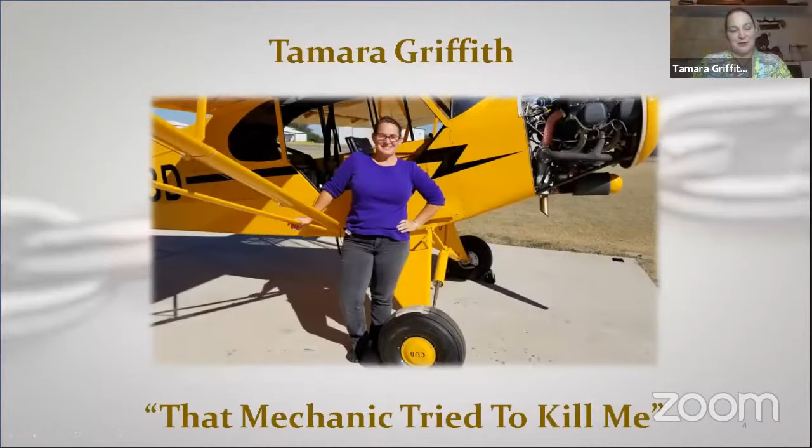Tamara, you have the flight controls. Well, that's a scary thought. I have the... just kidding, we got to have some fun, right? We should all be very afraid when I take the flight controls.

Great introduction there, Jeremy and Paul. Great to see you too. Look forward to seeing that 182 when you're all finished with it.

And welcome to That Mechanic Tried to Kill Me. This originally started with my mom back in the day, she started this program, and I've added to her original talk on That Mechanic Tried to Kill Me. So some of these are her stories, and then there's my stories and other stories that I've learned over the years. So without further ado, I have a PowerPoint, and I will share my screen so you can see all of what I'm going to show you.

Let's see if I can get this to work right tonight. Do we see everything? That mechanic. Yes, ma'am. All right.

So first day of 2020 is doing good.

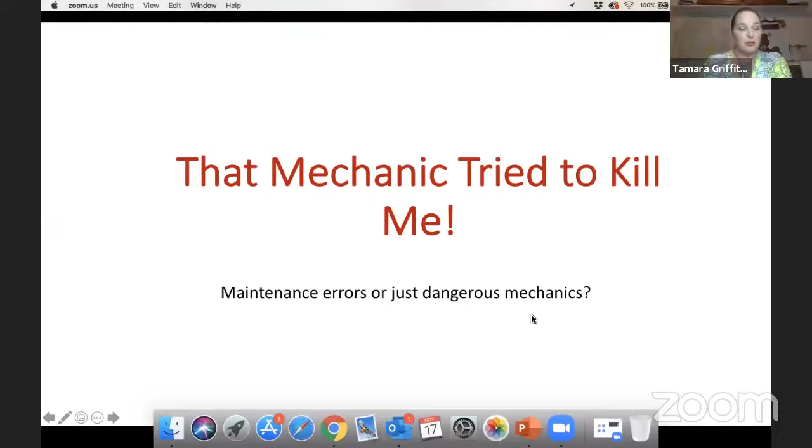It says it's all human errors. Everything, the majority are always related to probably negligence, but complacency also, simple mistakes from distractions, a variety of things, or a lack of skill or knowledge that comes into that. And then some of it is outright misconduct or falsified work, forgery in the logbooks, a variety of things.

And I've been in this business for 30 years, and I've probably been involved in many of the same things, if not guilty of a few of them myself.

And as any mechanic, we're always learning. We just want to know which is the right course to learn. I like to have fun.

So who are these mechanics I'm always discussing? Most of them are probably certified A&Ps, airframe and power plant, and or IAs, inspection authorized mechanics. Some of you are home builders or cheap owners or just owners, and others are apprentices and or school trained mechanics. So these are some of you that maybe without the information you're used to, they don't have the knowledge that we're expecting. So moving on to the next one.

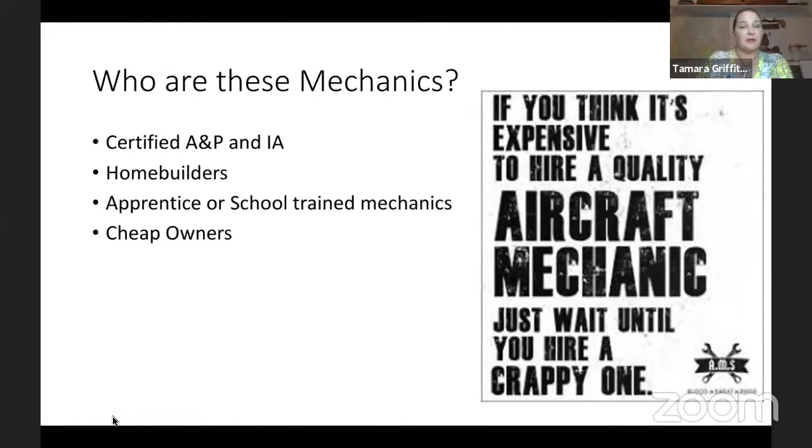So mistakes or negligence are probably your most common thing. So we're starting with this cotter pin. Simplified mistake, you can put this cotter pin in, you maybe fought it for 30 minutes trying to get it in the right place because it's in a hidden hole, and then somebody asks for your attention, something, and you walk away and you forget to go back and finish bending the cotter pin so that it won't fall out.

Could be simple from wiring, shimmy dampeners, putting safety wire on a brake pad. Anything is simple or unintentional negligence mistakes. True negligence is usually leading up to just ignoring the problem because, well, I got it in this far, we're good to go. We all know those people. We're probably all guilty of that at some point in something we do in our lives.

I take the stop, got to take a Mother Nature break. And that's when I'm going to miss a few screws in the inspection panel, or I'm going to end up leaving a rag. And some people leave random tools in airplanes. I can't tell you how many tools I've collected over the years. It's kind of fun sometimes.

But these are all common human errors. But the mechanics we sometimes consider inept in this, it's really, they're making typical mistakes we all make. But sometimes it's truly inept mistakes that you just go, why do you not care about what we're doing?

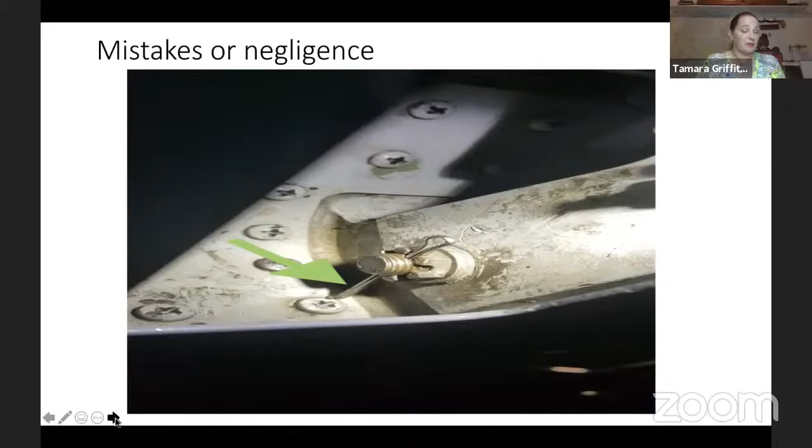Like safety wiring, this next one's kind of fun. You look to the left of your screen, there's that beautiful one here. Looks really good, except they missed the hole by one little bit. Okay, like it's safety to itself. I don't know where you're going to go or not go with that one. They tried, we'll give them that credit.

They did try. Or then they go to the next one. Did they really try? Because the idea is it's supposed to always tighten and there's supposed to be so many loops. You got to wonder about the mechanic who thought this was good enough.

Most of the time, safety wire is not hypercritical because it's designed to break, but it's designed to prevent catastrophic failure in a lot of ways so that you would catch it early. But if you don't catch it early or you do it poorly, it could lead to problems. Where it's hypercritical is probably on a prop bolt or something critical like that, or maybe a drain plug on your oil, because who wants to lose all their oil in a hurry?

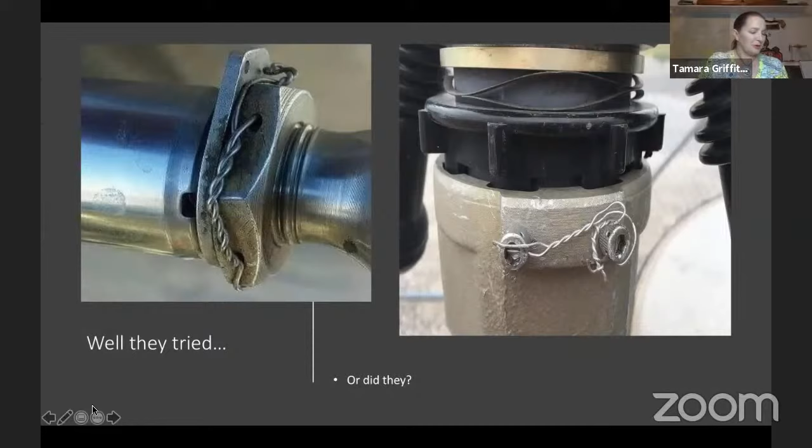And then there's this next safety wire. What the F? We don't know what somebody was thinking. There's this beautiful safety wire-ish going all sorts of ways. Great artistic, I'm just not sure it's functional. So moving on.

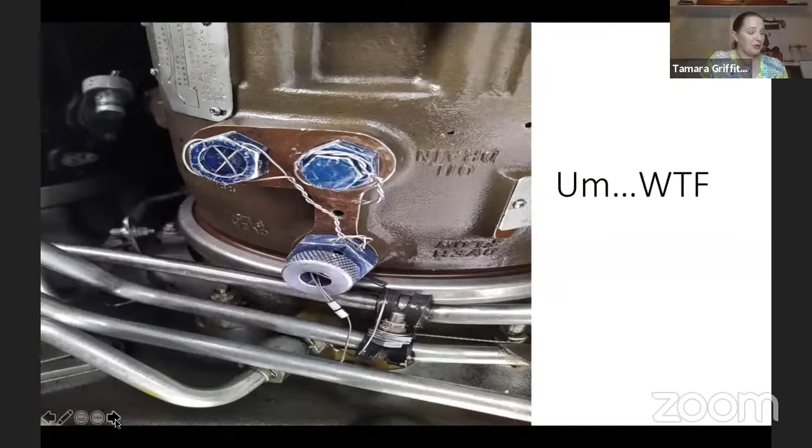And pilots and mechanics can relate to this quote: don't cling to a mistake just because you spent a lot of time making it. Pilots, like mechanics, we make mistakes, and try not to spend forever trying to rationalize or justify it.

And one will likely notice mechanics, like pilots, hate being told they've screwed up. And we will spend an inordinate amount of time defending our screw ups. And I don't think any of us are not guilty of this occasionally, because we don't like to be wrong. Mechanics are probably high on that list, as well as the captain that you fly with. You may be the captain for all I know.

And we can start with pilots and mechanics making their screw ups. I'm going to confess this is partly my screw up. So it started with a Cessna 152.

I removed a carburetor because it was overdue for an overhaul. We pulled it off, sent it off to the shop. No big deal, we stick a new carb in.

The carb in the picture is not representative of the actual carb on the 152, just in case somebody wants to be that technical. But you see in the circle this little discharge tube from the accelerator pump that discharged extra fuel into the carburetor. This is important to know because it was installed on the new carb, and it was there in the new carb.

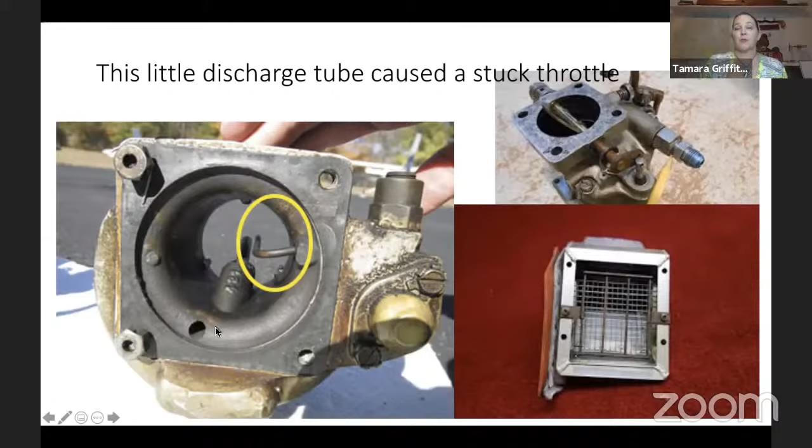And with that, they gave me this baggie, and I could see the plastic float and all these other parts. I didn't think much about it at the time, other than we were darn lucky that we never had an actual issue. There's an AD on these carbs to replace that plastic float along with the jets and stuff, so that you don't have a loss of power, especially on takeoff, which happened to a lot of people. And takeoff loss of power is not a good thing in a 152, by the way.

So I felt lucky at the time, but I didn't think much about it beyond that, because it was stamped on the side of the carb saying it was done, as well as the logbooks indicating this particular AD was done. Obviously, it was not done. So back to my previous carb, I'm finding extra parts in my airbox.

I pull this baggie out, and sure enough, nowhere in this bigger picture do you see that little tube. That was the missing item. We found it in our airbox, and probably in one of my stall practices, it floated just perfectly inside that butterfly and caused the throttle to get stuck wide open. Fun times, but no problem. That student went on to further their education. It was amazing how many times that led to the problem.

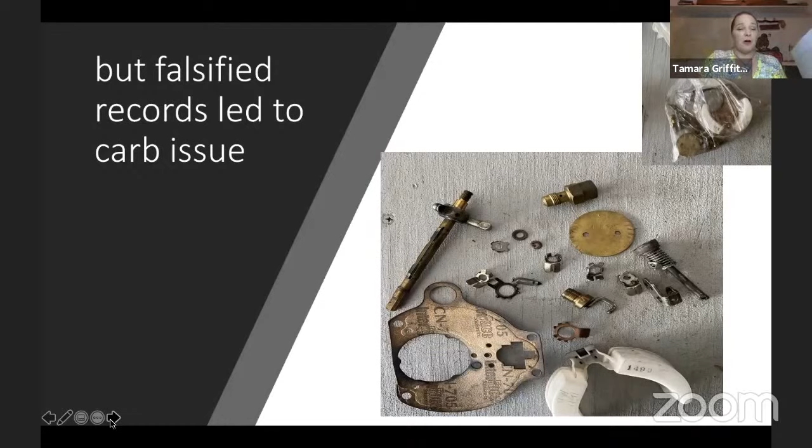But falsified records get me every time. I was really irritated, and we were very lucky during check rides and solo students. We never had an actual failure with the original carb. I'm not as worried about a throttle stuck open, other than we're going to have to shut the engine off if it was a solo student. But that's what I teach them for.

More examples of falsified records. I haven't seen this one in particular, somebody showed me this one and I kept it. A magneto signed off for over 58 years of annual inspections. Most magnetos need about every 1,000 hours inspection, and there's usually a 500 hour as well.

It depends. Pilots and mechanics, we're all guilty of this one thing: if it ain't broke, don't fix it, don't look at it. I get that, trust me, I get it 100%. But some things do need to be looked at, as we can see a lot of things in there that's probably not a good look. Good point. I just collected the pictures.

I've seen alternators not signed off, and they've been checked or redone at some local alternator shop, not done at the approved ones. Starters the same way: 30 years of flying and this starter's never been changed. I'm not quite buying this.

We've all seen it, we've probably bought an old airplane. Guess what? You're gonna see this. It is kind of fun. Oops, I screwed up my paperwork here, let me get my notes right. Got to turn the page over. Sorry, my bad. And bag of parts. And then we go to the next scene.

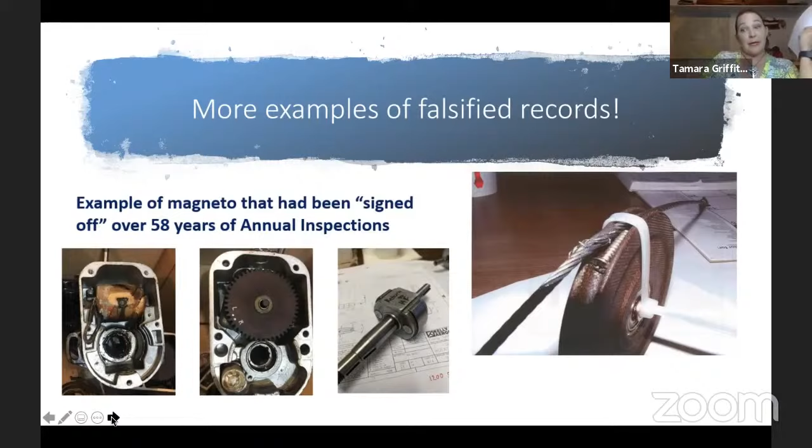By the way, I told you she went up an extra 1,000 feet, right? She rolled out with that trim 500 feet AGL above the ground. She barely recovered, if you think about it. If she'd been at the normal altitude, she would not have recovered that airplane, and I would have not had a mother anymore. So she didn't try to kill me directly, but that mechanic tried to kill me, or at least tried to kill my mom.

Shortly then, many years later, my mom was flying a Navajo with my dad — they fly corporate a lot. She went to go pick up this Navajo. I don't have the original picture, but I found one of where the indicator for the trim is, with the little arrows pointing. The mechanic told her when she picked it up that he adjusted the trim indicator, not the trim, but the trim indicator on the Navajo, because it was so hard to see. What a concept, so hard to see.

So without checking what it's doing on the outside, he takes it apart internally and fixes the indicator so it's showing neutral, even if the controls outside are not neutral. If anybody's ever flown a Navajo, for a twin it's extremely heavy. So depending on where the controls actually were, not knowing that, a pilot either would not have been able to pull that airplane up, or it would have been stuck in enough up trim that they probably couldn't have put it nose down enough to prevent a stall.

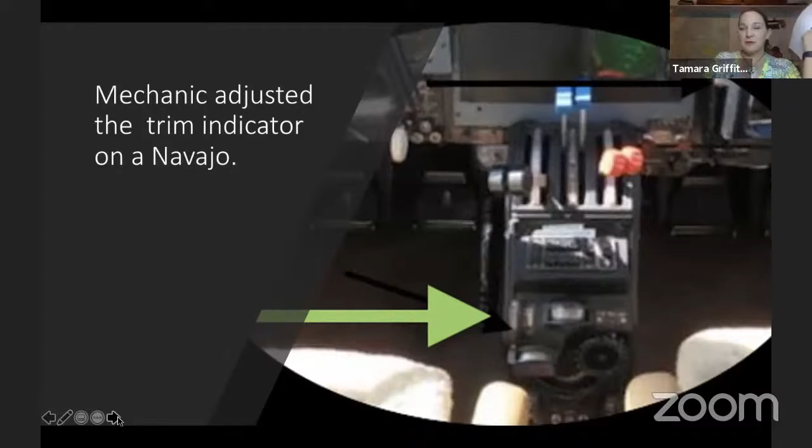It would have been a stall, and it would have been ruled pilot error, even though it was a mechanic-induced error. Luckily, somebody happened to mention it to her, so she was able to get that fixed before she attempted a flight. Another one of those. I'm really glad — I was probably a teenager at the time, but it still would have been heartbreaking to lose my mother at that age.

So, moving on — mechanics are, we think, our biggest problem, but sometimes it's the owners. I found this cartoon based on another fatality, and they were talking about something not being replaced, not a bad leak. Owners notoriously can be cheap. Hey, I get it, aviation's expensive, right? Paul can tell you how expensive his 182 is probably turning into, but that's part of what it is, that we're going to pay that price one way or another.

Like the previous slide said, if you think it's expensive now, wait till you hire a bad mechanic. But owners would love to tell mechanics, don't fix it, don't do this, don't do that, it'll wait till another time. So while I don't have any information on this particular incident, I did take note, and that leads us into owners can be the bad mechanics also.

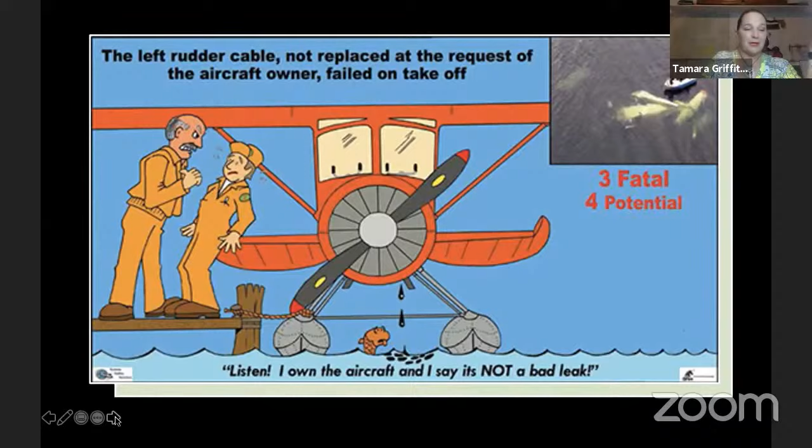This one includes my daughter. Note down at the very bottom, there's a beautiful girl standing next to a beautiful airplane, a little tri-pacer. This was on her 16th birthday when she had soloed that along with 4 other airplanes. It was a great flying little tri-pacer — I loved flying that little tri-pacer all day long. But after a couple of years, it turned into what you see above it, and you see the aftermath of it landing in a field.

This was the owner who hired a dangerous mechanic, I would call it. Going back to my notes to get this correct — she had soloed in 2009, and in 2011 there is an NTSB report for this particular tri-pacer. I and another mechanic had noticed a fuel leak in this airplane probably a few months prior to this fire damage. We informed the owner, but he didn't really want it fixed then.

We did do some other maintenance to it at the time, and we only signed off exactly that maintenance for that reason, because he refused to deal with the problem.

Fuel leaks obviously are bad. Any fuel leaks near an exhaust system are twice as bad, right?

But he did want an annual. We, of course, were not going to do the annual. So he hired somebody, and we're just going to call this person... he had another nickname, Dangerous was the first name, but I'm going to use a different name, Dangerous John. We're going to call him Dangerous John.

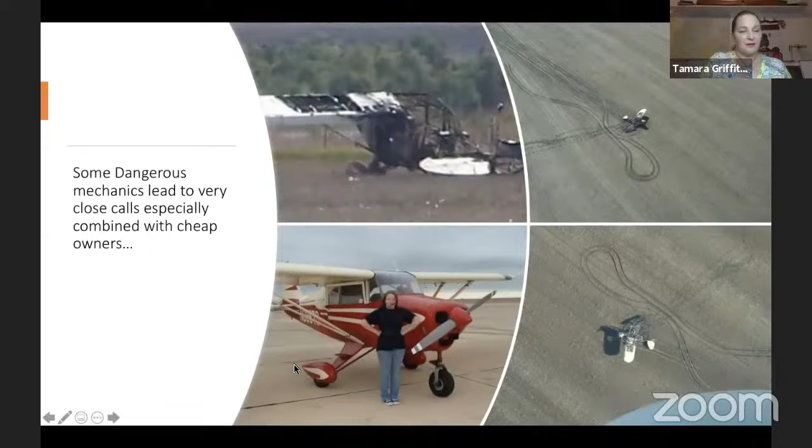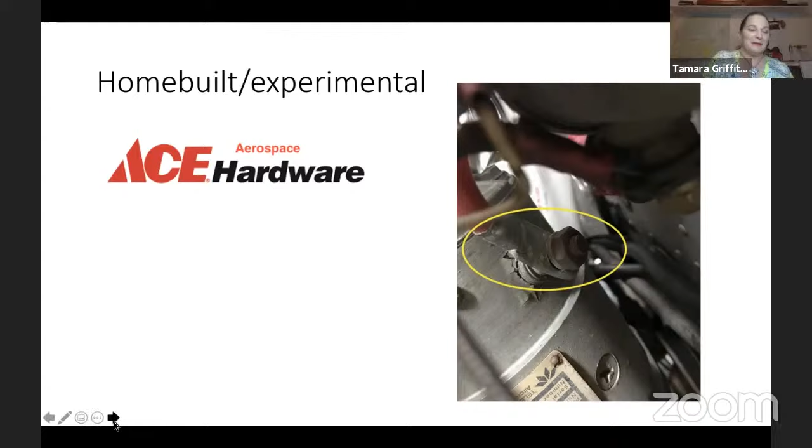To lighten the relativity here, I pick on my home builders all the time - love you guys, I have a lot of friends who fly RVs, these various home-built experimental airplanes. So I pick on you because I also occasionally shop at Ace Aerospace Hardware. As you can see here, circled was definitely not aircraft quality - probably maybe a starter or alternator part, I don't know. But it's kind of fun to pick on them, though they're not really always the worst.

Home Built Depot, Depot is what I call them - finding interesting hardware on your airplane, you're going to find it.

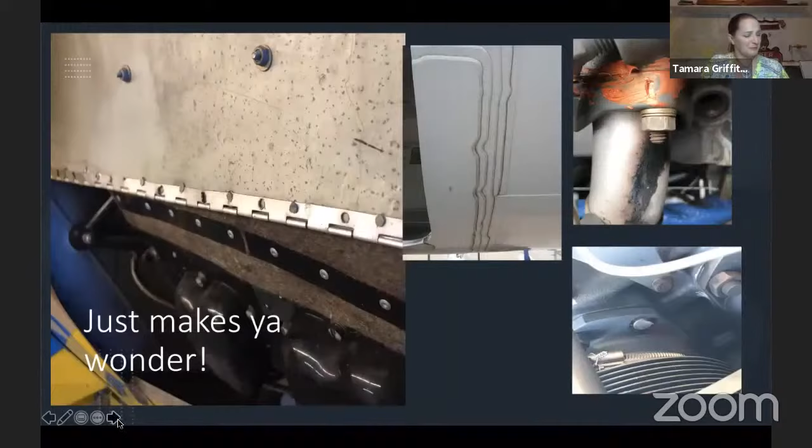I couldn't even tell you what year it was. So there was always a standing order for any maintenance shop for this airplane, by the owners and by the pilots - who are also mechanics, by the way - that if you remove hardware, you will replace the hardware. Not a bad policy, in my opinion. That meant even the cheap hardware gets replaced as well as the expensive one. And I do have a philosophy that if you've torqued hardware, any bolts you've torqued, you probably should replace with

new when possible. Some studs and stuff, obviously, you can't just replace immediately. But anything torqued, you should consider replacing if it's possible, because when you torque something, you've stretched it, you've weakened it, and eventually this might happen.

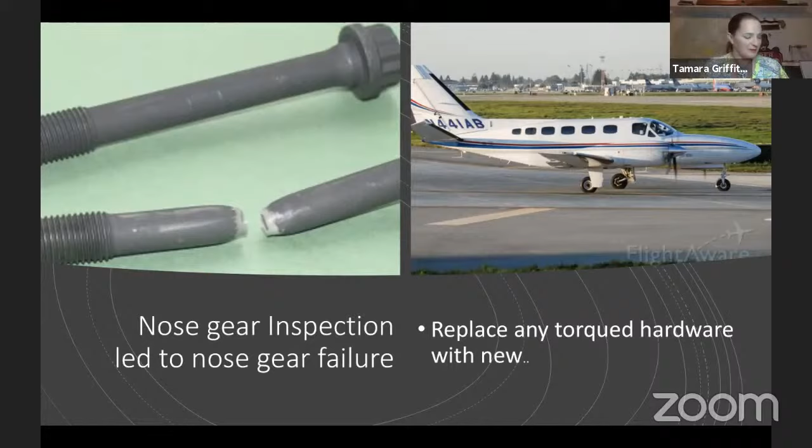Big deal for us. This next one is interesting - non-approved parts, or unapproved parts. We hear this one all the time.

He discussed mostly the decisions for the accelerate-stop because he was focusing on the pilot side. But the entire incident was truly mechanic induced, very much just mechanic induced.

The airplane had just come out of a 100-hour inspection. The owner and the mechanic were taking the plane for its post-maintenance test flight before releasing it back to the school, which is a policy I approve of, which is what I do at my flight school, by the way. I just happen to be the pilot and the mechanic, so I had to do both.

They said the controls checked good on pre-flight, everything moved according to what you would expect. They pulled out on the runway, started rolling down the runway, everything's good, got to rotation speed. The pilot's trying to pull the yoke back. By the way, the mechanic of this airplane was sitting in the airplane with him, so he's along for the ride in this case. Not very often that happens.

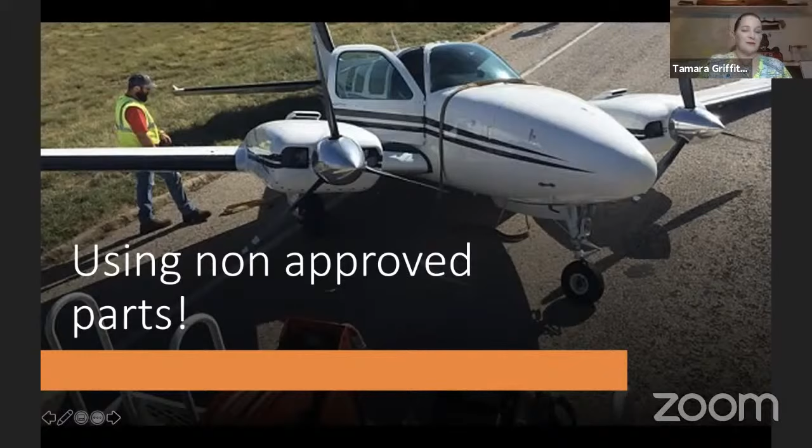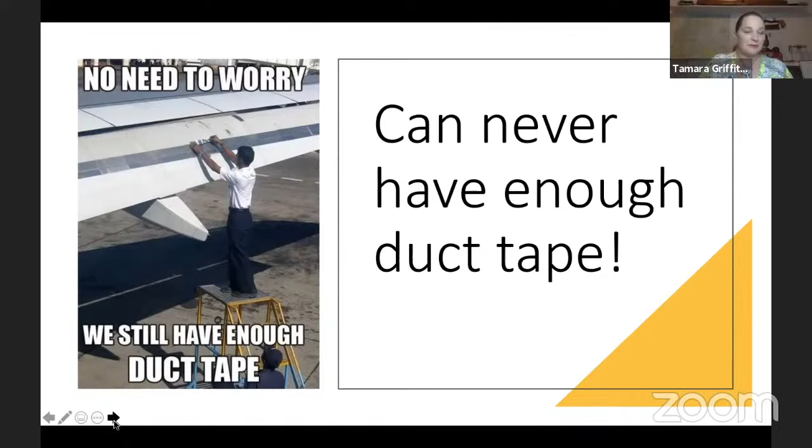Back to the bolts. Both bolts on props and safety wire, if required, would be the one area that could get a pilot into more danger than a bolt, say, on a failing gear.

You can relate to a prop nearly coming off. I can relate this to a prop coming off of a Cherokee 140. Excuse me, getting a dry mouth. Give me a second.

This Cherokee 140 that I'm talking about went into an extensive annual, and I mean it was a very reputable shop that was definitely not on the cheap side. They were very proud of their service, and they had good reason to be. But they had done this extensive annual on a Cherokee 140, and it cost almost as much as the airplane itself, which was kind of mind-boggling at the time. This has been several years now.

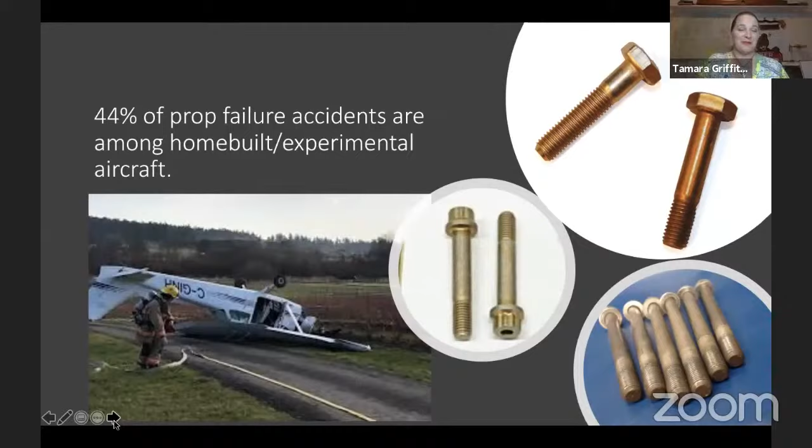So always consider your next maintenance inspection. Who are you going to hire? Who is going to do the work? Who is your backup plan? Even if you do the work yourself.

I do this all the time as a mechanic. I call my husband, I call some friends to come and look at my work, and then those same people call me to help them look at their work. We're trying to put two or three eyes on the same situation. My home builders, some of them have called on me when they wanted something, or other mechanics. So always consider, because it's not just you that's involved. It is your life, your livelihood, and your estate, which is your family, being directly affected by your decisions.

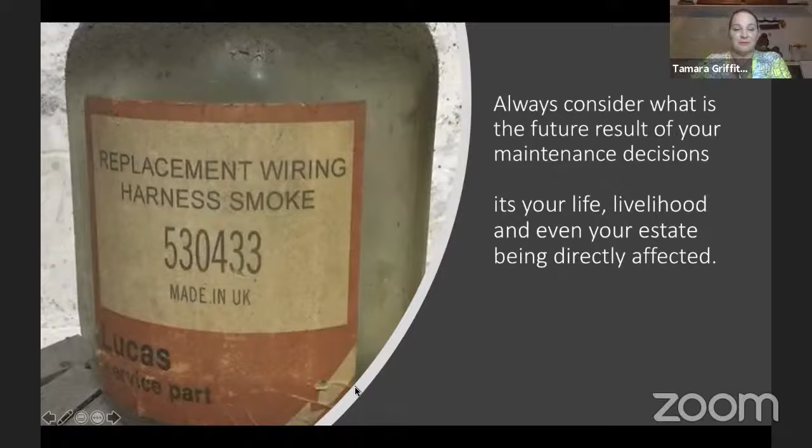And that concludes my talk on mechanics. Now I can take questions.

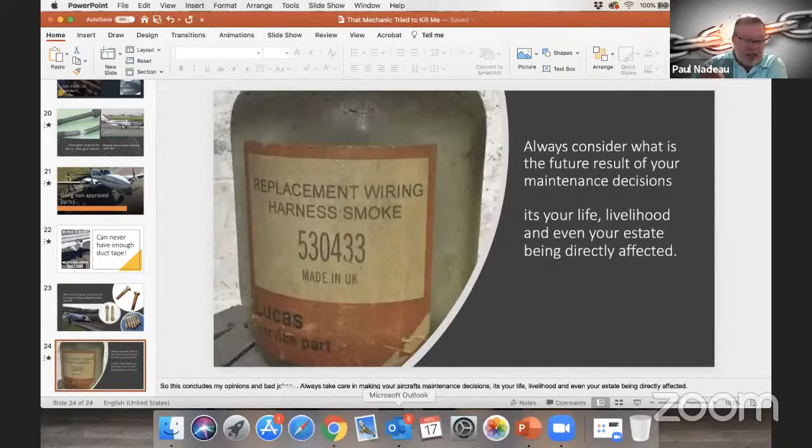Awesome, right Tamara. Awesome, that's really good. Here, there we go. How's that? There you go. Yeah, we're back again.

That was a very good presentation, Tamara. I always ask my guest speakers this question before we go into any other question, and that is, what is your definition of a professional pilot?

Ooh, that's a tough one. The professional pilot, I would say, doesn't dwell on their mistakes and is always tactful in how they're going to address anything. But they always stand their ground. If you've got to say no, you've got to say no. You don't let somebody talk you into something you shouldn't do.

Right, so in other words, you don't allow yourself to be forced into a bad situation because of the desire to get there, or get-there-itis, or anything like that. You're talking about someone saying, I've got a funeral to go to, or I've got to go to a casino in Vegas or whatever, and the weather is crap, or not everything is working properly on the airplane. That would be in this context, yes, or sometimes just even telling them no, because you can't be the nice guy, because the nice guy sometimes gets you right into that same problem.

That's right, I like that answer. Paul, you want to take the next one? Yeah, sure, no worries at all. It was a great presentation, Tamara. It was really, really good.